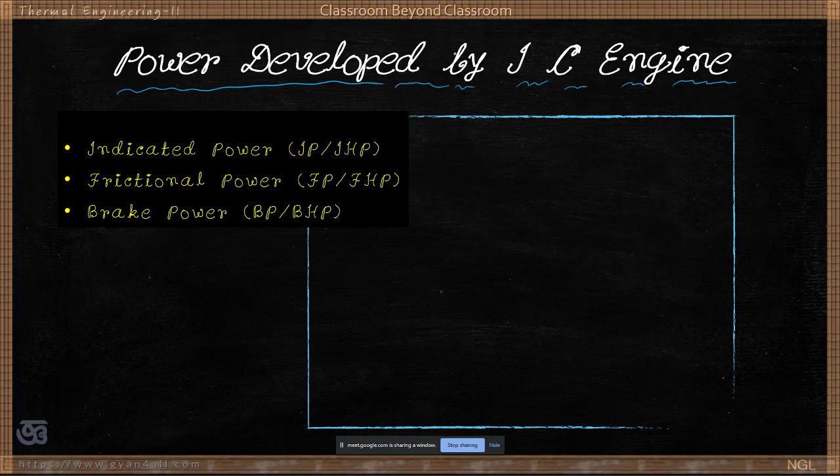Work is done by the IC engine, and accordingly one is indicated power. It is also called IP, and also sometimes it is called IHP, that means indicated horsepower. In metric unit it is called IHP, in SI unit it is called IP.

And there is another power called frictional power, and one is brake power, BP or BHP, similarly FP or FHP. So originally the power is developed inside the cylinder during the stroke called expansion stroke or power stroke or work stroke.

So in this stroke the power is developed and the piston is pushed downwards from TDC to BDC. So this is the length of stroke represented by L under some pressure P. Pressure P means force. Force into distance is work done. So that work developed inside the cylinder during the power stroke or working stroke is called indicated power.

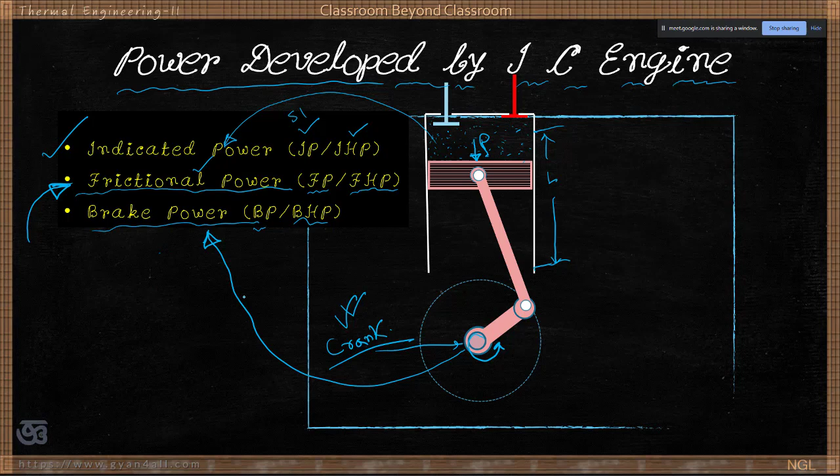So let's see what is IHP, BHP and FHP. So the indicated power of an IC engine is the power developed inside the engine cylinder. We have already mentioned the power developed inside the cylinder, and this power is developed when? During the power stroke, expansion stroke or working stroke.

So this power is responsible for piston movement. So this power is given to the piston. The power developed inside the cylinder goes to the piston. Now it is available in the piston, and ultimately it will go to the crankshaft.

So the power developed by an engine at the output shaft; the crankshaft is also called the output shaft. So the power available at this output shaft or crankshaft is called the brake power. It is called BP or BHP. BHP means brake horsepower. IHP means indicated power or indicated horsepower.

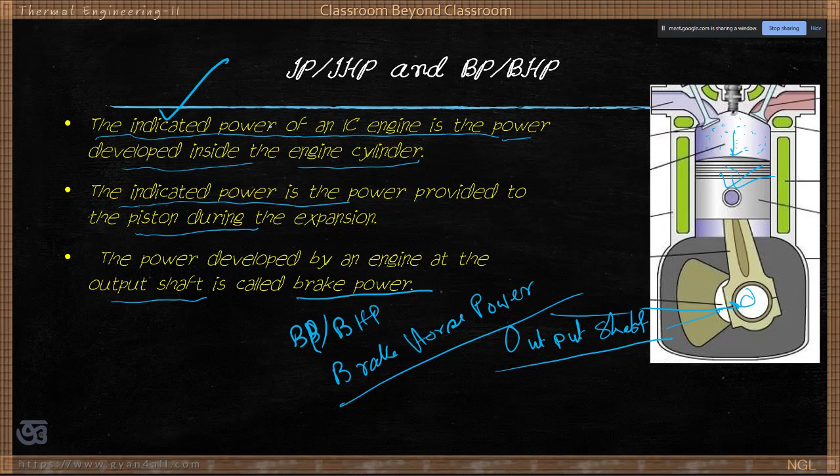That heat energy is converted to work and that is transferred to the piston, and from the piston it will go to the connecting rod, and ultimately it is available at the crankshaft or output shaft. So this can be represented like this. So how is the power available inside the cylinder?

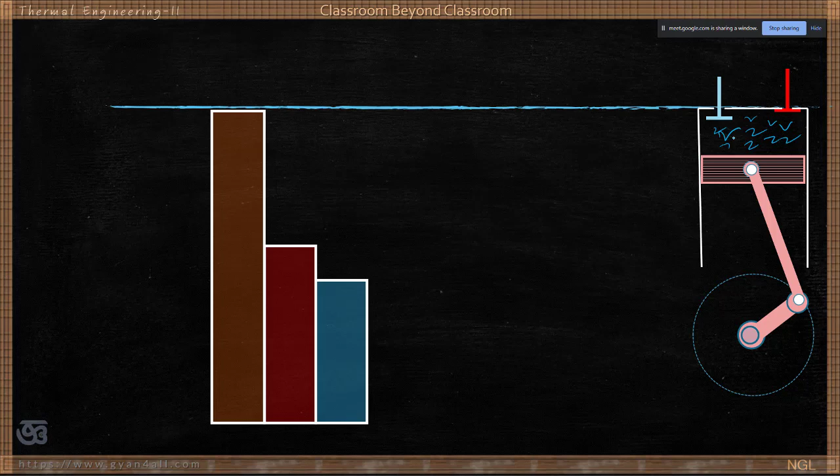Because of the combustion of the fuel. So this energy is called heat and this heat is derived by burning fuel. So fuel is burned, that means fuel is chemical energy, and that can be represented like this.

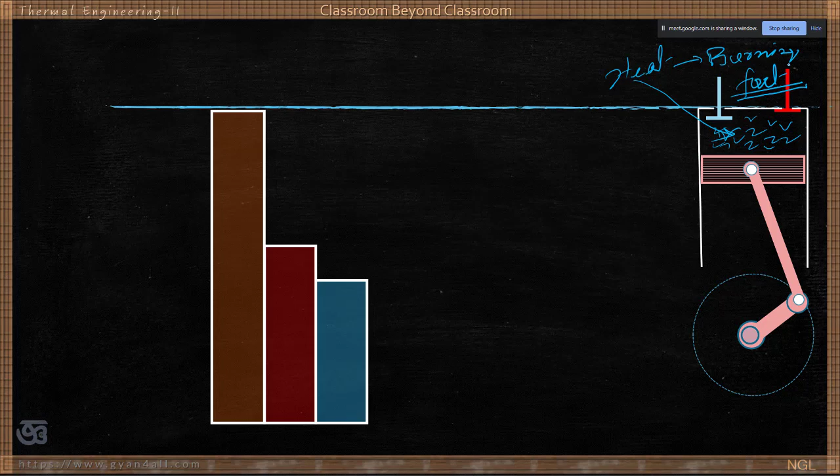So originally the energy is in fuel and this fuel is burned by combustion inside the cylinder and that will produce heat energy, and that heat energy is converted to work which is actually the IHP. So from this fuel energy it will be IHP.

So we already know that the whole of the heat is not converted to work. Only a part of the heat is converted to work in a heat engine. So, although this amount of heat was produced by burning the fuel, the rest is lost and this amount is available as indicated power. That means this power is already developed inside the cylinder and that pushes the piston downwards.

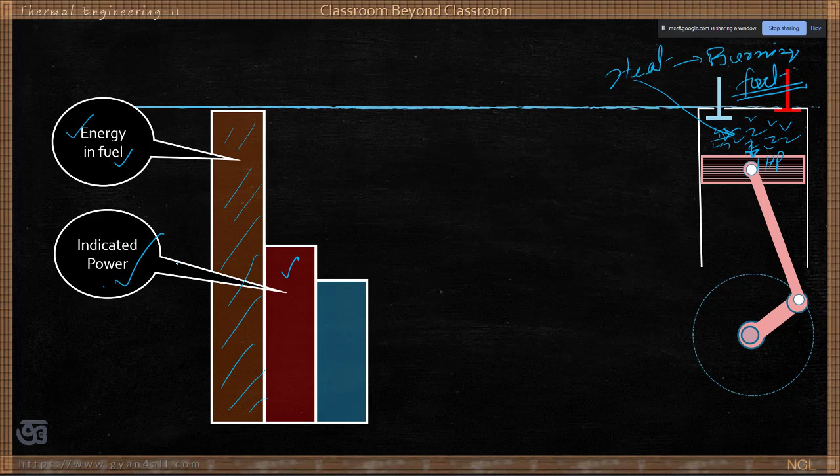Then again, this power is now available at the crankshaft. So before then, energy is lost in the exhaust, also during cooling and radiation. Out of this energy, this amount of energy is lost and this amount of energy is converted to work. So out of Q1, Q2 is rejected and W equals Q1 minus Q2. This is the principle of heat engine.

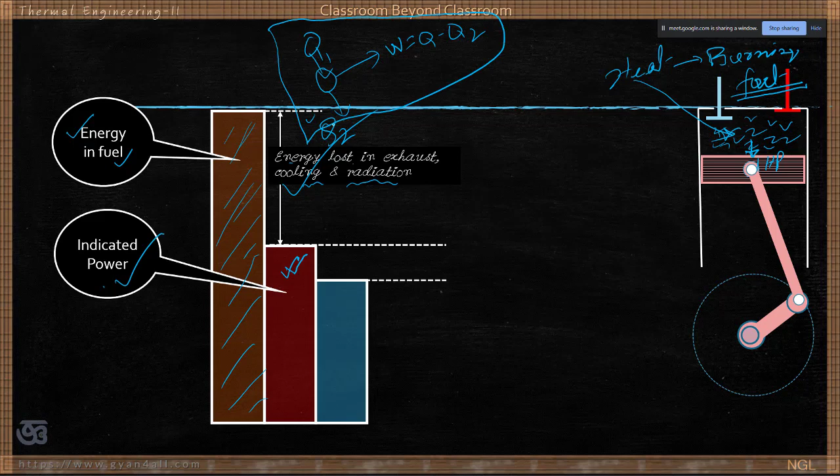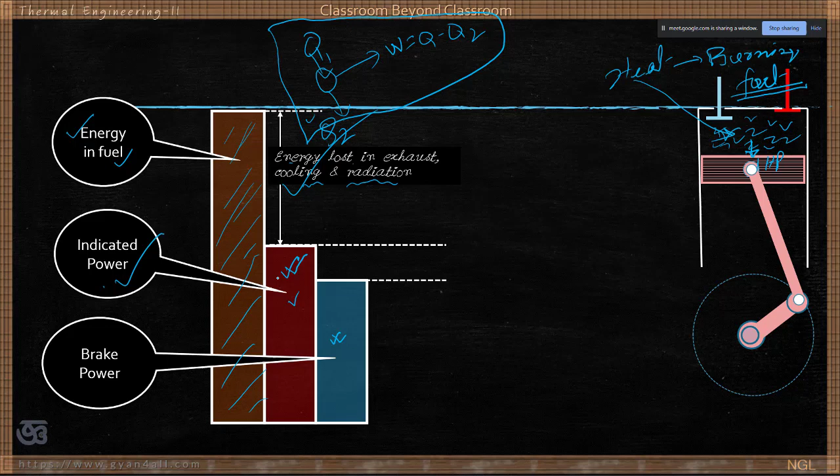Out of the total amount of energy, a part of the heat energy is converted to work, net work output. So this is work done in the form of IHP. Now what is brake power? Power available at the crankshaft is again less than this IHP and this amount is lost. How is energy lost? In friction, during pumping, etc.

So at the first place there is loss due to the exhaust. The exhaust gases carry some heat. That means that heat is not utilized and not converted to work. And also some heat is lost by the cooling system. The coolant carries the heat from the engine and there is some loss due to radiation and so on, any type of loss. So from that we get some amount of useful work that is called the indicated power

and this indicated power is not 100% transmitted to the crankshaft. Much less reaches the crankshaft because of frictional loss: friction between piston and cylinder, friction in the crank pin, friction in the piston pin, that means gudgeon pin, also in the big end bearing and such pins, and also some amount of torque is utilized by the camshaft, and the camshaft runs some pumps, valves, etc. So this way there is some loss of energy. That is why the energy available at the crankshaft is called the brake power.

This is like your income. Say you have some income and out of this income you have some savings, and in between there are some expenditures. After that this is available for other uses.

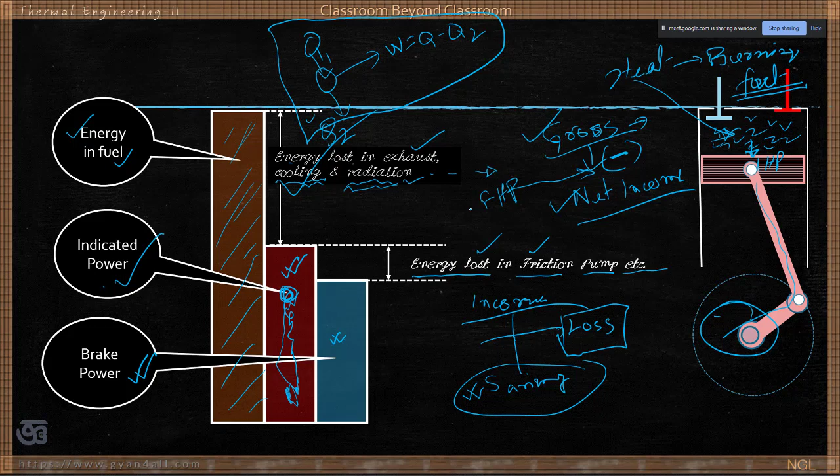So what is frictional HP? As a formula we can write: IHP is the power developed inside the cylinder, IP, and that is equal to BP, brake power, plus FP. We can also write BP is equal to IP minus FP. That means the power available at the crankshaft is equal to the power developed inside the cylinder minus FP, the loss due to friction, pumping, etc. So BP is equal to IP minus FP.

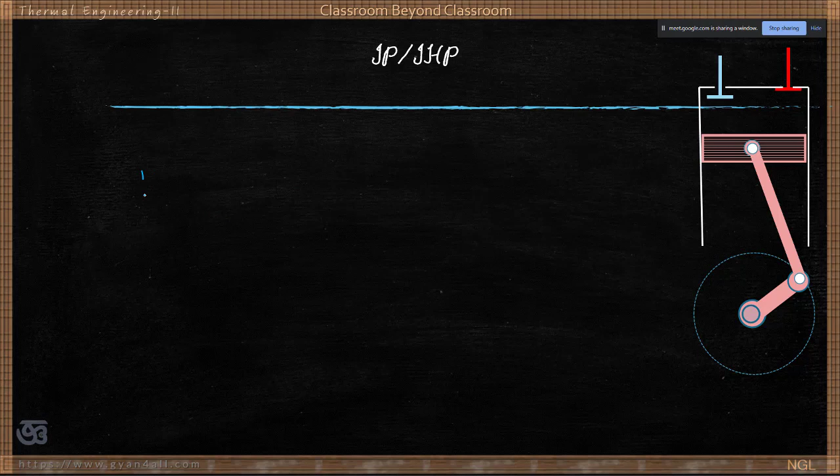Work done. What is work done in an engine? How do we find work done? We will try to calculate the IHP or IP. This is the power developed inside the cylinder. The piston moves from TDC to BDC during the expansion stroke and the length of the stroke is L. So work done is simply force into distance. That is the basic formula for work done, and in this case also that will be the formula, only the form will be slightly different.

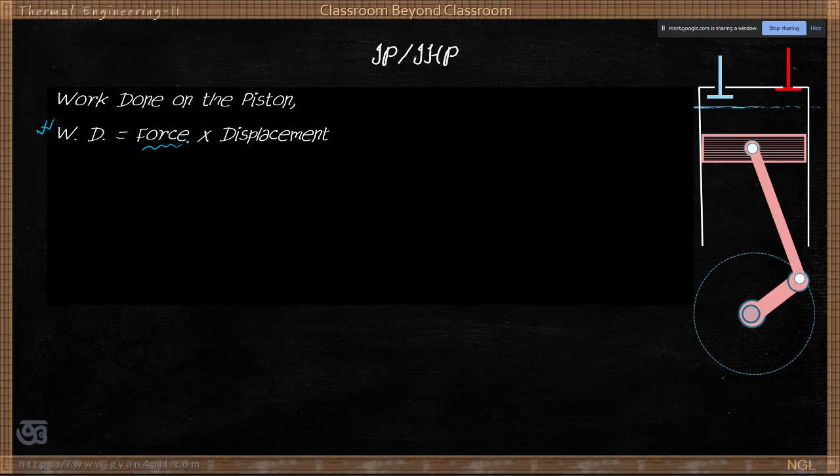What is power developed inside the cylinder? Work done on the piston. Actually pressure is developed inside the cylinder and then some work is done on the piston. Then this power is transmitted to the crankshaft. So how much is it on the piston? Work done is equal to force multiplied by the displacement. What displacement? The displacement of the piston from TDC to the BDC.

And what is the force? Directly we cannot calculate force inside the cylinder, but we can measure pressure. So force equals pressure into area, and displacement is the length of the stroke, or simply the stroke. Now this can be written as pressure multiplied by area into displacement.

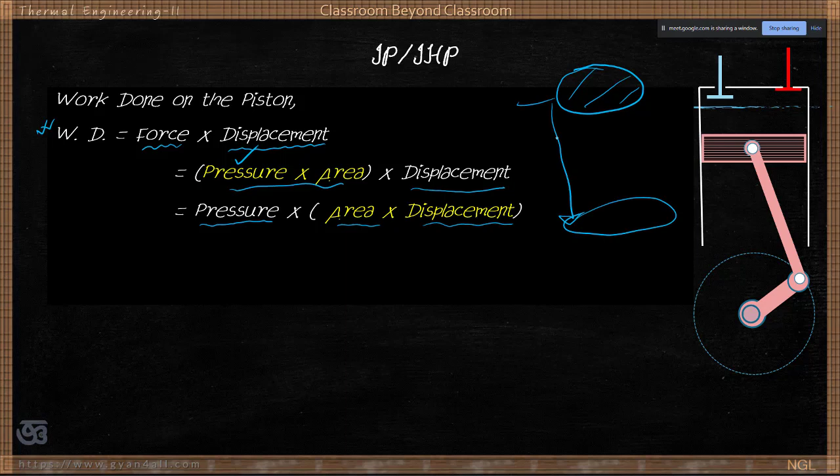So what is area? The cross sectional area of the cylinder. And what is displacement? Displacement from TDC to the BDC. So this is L and this is A. That will give you what? Area into length, that we have discussed earlier.

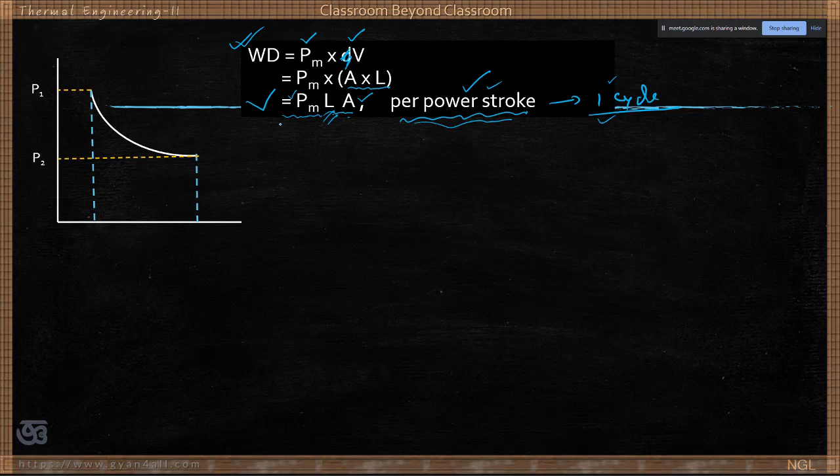পিষ্টনটো এবাৰ TDC ৰ পৰা BDC লৈ আহে. That means length of the stroke L, area of the cylinder A, PM is the mean effective pressure. So this is work done in a stroke, that is called a power stroke or working stroke or expansion stroke. And this amount of work is developed during the power stroke only. So গোটেই cycleটো যদি consider কৰো আমি ক'ব পাৰো in whole cycle this amount of work is developed. One cycle.

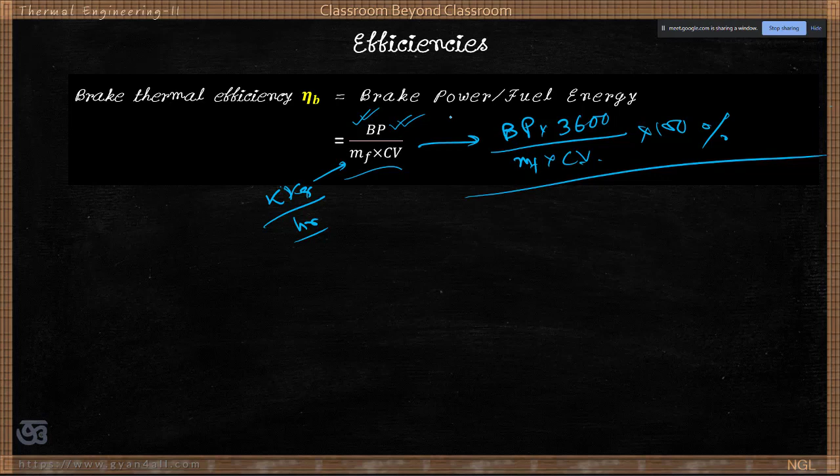There is another term called mechanical efficiency.